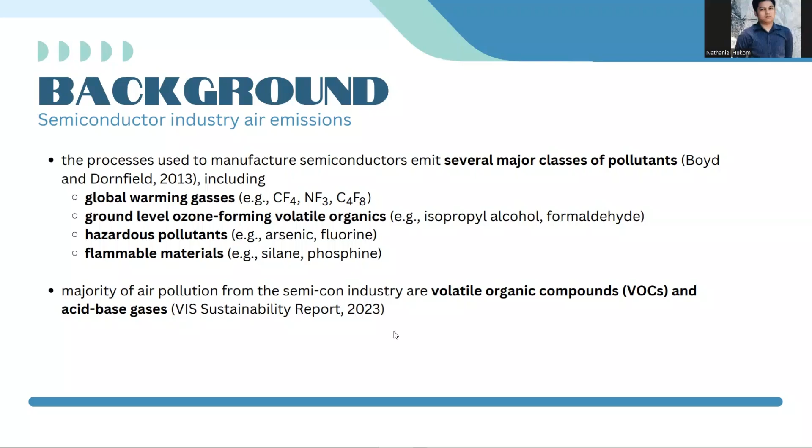Additionally, based on the 2023 VIS Sustainability Report, a large portion of air pollution from the semiconductor industry is composed of volatile organic compounds and acid-base gases. For reference, based on the same report, fabricators of semiconductors in Taiwan and Singapore emitted VOC in metric tons from 38.71 in 2021 to 32.5 in 2022 and 29.03 in 2023.

The decrease in the VOC emissions is due to the adaptation of the technology that treats the pollutants in the waste gas, and they were able to meet the goal of 38 metric tons for 2023, which is well below the standards set.

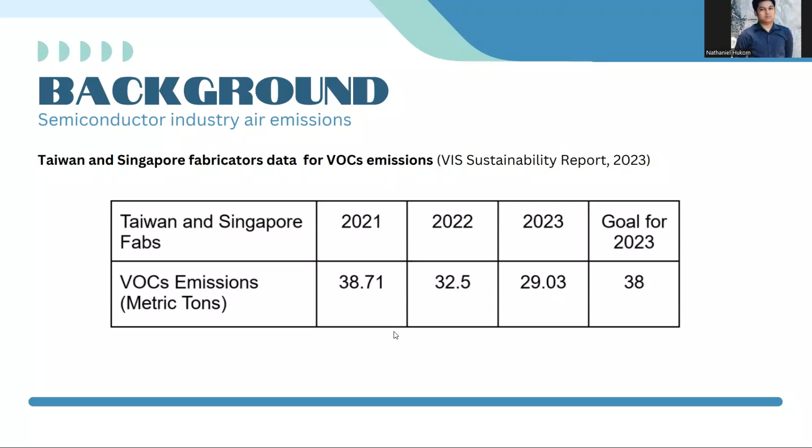In addition, for VIS Taiwan fabrications, which primarily used natural gas as fuel, emitted nitrogen and sulfur oxides were recorded from 2021 to 2023 as shown. For nitrogen oxide, it increased from 18.46 to 20.86, and for sulfur oxide, it increased from 9.79 to 10.95.

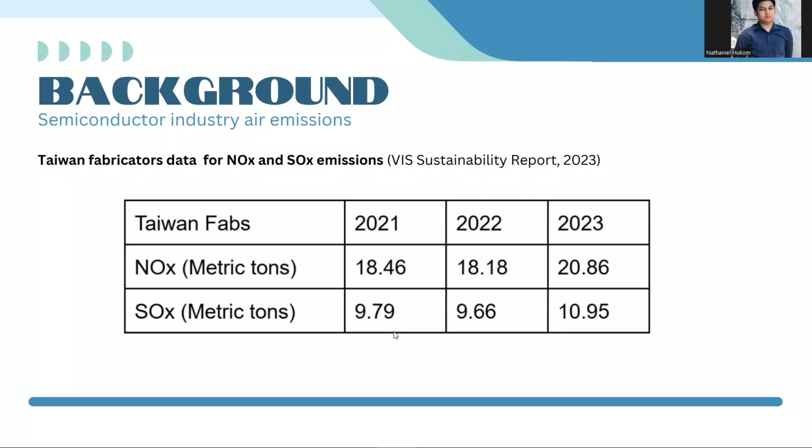Now let's proceed with greenhouse gas emission of semiconductor fabrication. According to Ruberti 2024, the world's major semiconductor foundries' greenhouse gas emission in 2021 was recorded to be 3,799 kilotons of carbon dioxide equivalent. These came from combustion in sources owned or under the organization's control, such as boilers, furnaces, vehicles, etc., and those from chemical production in process equipment.

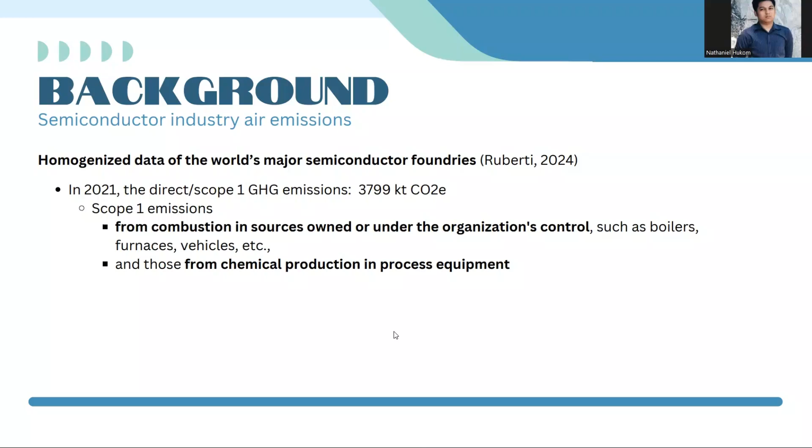In addition, according to the National Emissions Inventory by the U.S. Environmental Protection Agency, in 2005, it is reported that the semiconductor industry in the U.S. contributed a total of 67.9 tons per year of hazardous air pollutants, where the major inorganic acid emitters were identified as HCl, composing 10%, and HF, composing 9%.

Good day. For the next slide, I will discuss the process flow chart of the semiconductor manufacturing process and the air pollutants generated in each process. So as we can see here, it starts with the wafer fabrication, which establishes the base material of the semiconductor. It is created from silicon or any other semiconductor materials. It produces air pollutants such as acid, alkaline gases, and organic solvent vapor.

For the next process, we have the thin film deposition, which adds the layers of the circuit structure. So dito, the thin layer of material such as silicon dioxide o kaya naman metal or polysilicon is deposited onto the wafer surface using chemical or physical vapor deposition, the CVD and the PVD. Some of the air pollutants generated are acid alkaline gases, toxic gases, and combustible gases.

Next process is the photolithography, which defines the patterns of the circuit. Yung pattern dun sa circuit na nakikita natin. So, a photosensitive resist is applied, which is patterned using UV light that creates the layout of the circuit. The air pollutant produced here is the organic solvent vapor.

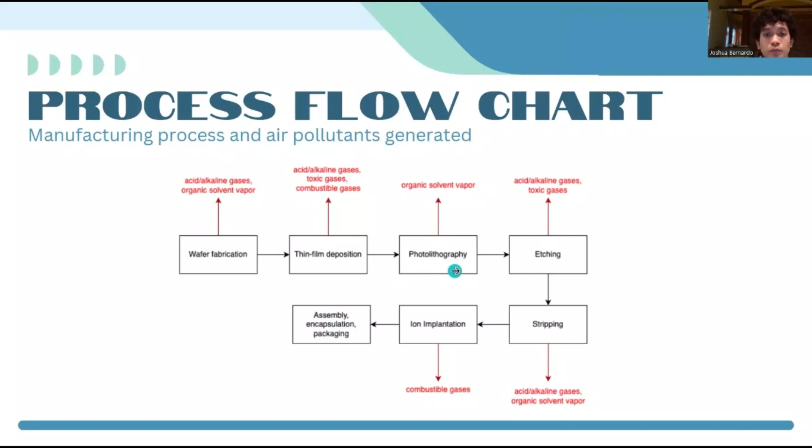First, we have the acid and alkaline gases, which are gases with acidic or basic properties, often from the cleaning, etching, and stripping processes. In the wafer fabrication, the acidic gases are produced with the use of sulfuric acid and hydrochloric acid up to hydrogen peroxide, and the alkaline gas is produced with the use of ammonium hydroxide. In the thin film deposition, the alkaline gas is produced with the use of ammonia.

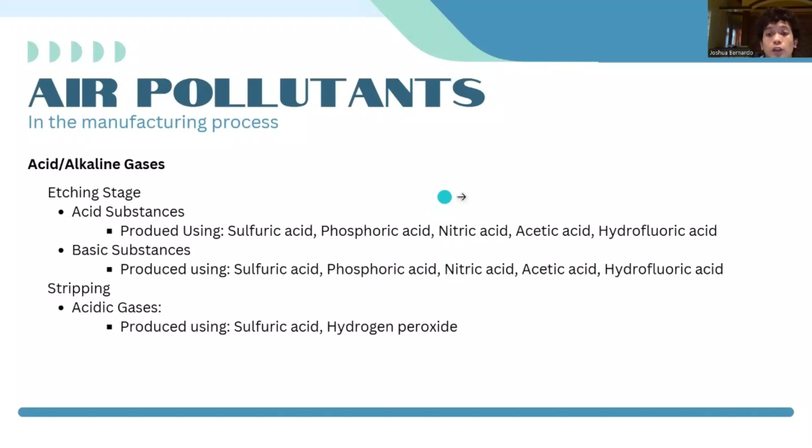In the etching stage, acid and base substances are produced with the use of sulfuric acid, phosphoric acid, nitric acid, acetic acid, and hydrofluoric acid. In the stripping stage, the acidic gases are produced with the use of sulfuric acid and hydrogen peroxide.

Next, we have the organic solvent vapor, which is the vapors from the volatile organic compounds, or what we call VOCs, used in cleaning and photolithography. Syempre, it is also harmful to health, and it can contribute to ground level ozone formation, or what we call smog.

In the wafer fabrication, it is produced with the use of isopropyl alcohol, and in photolithography it is produced with the use of propylene glycol methyl ether, tetramethyl ammonium hydroxide, and hexamethyldisilazane. And in stripping, it is produced with the use of N-methyl-2-pyrrolidone and dimethyl sulfoxide.